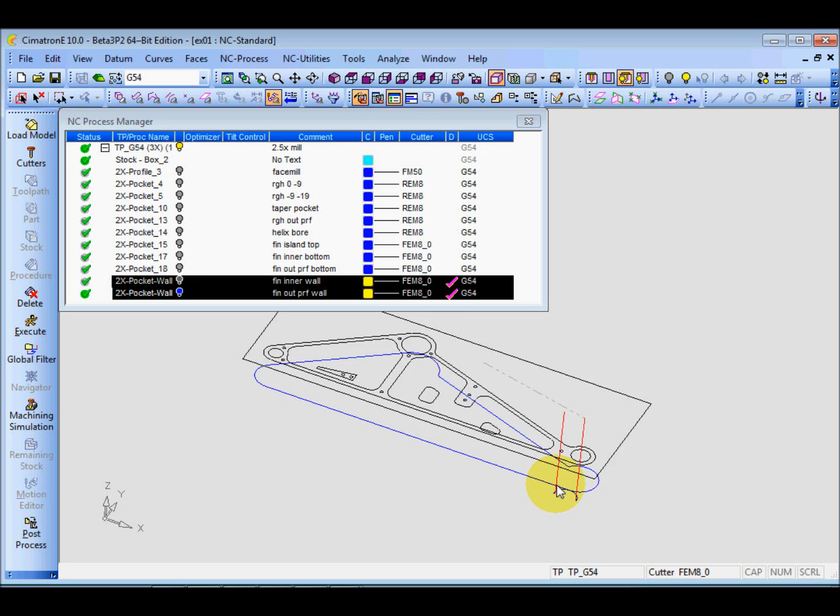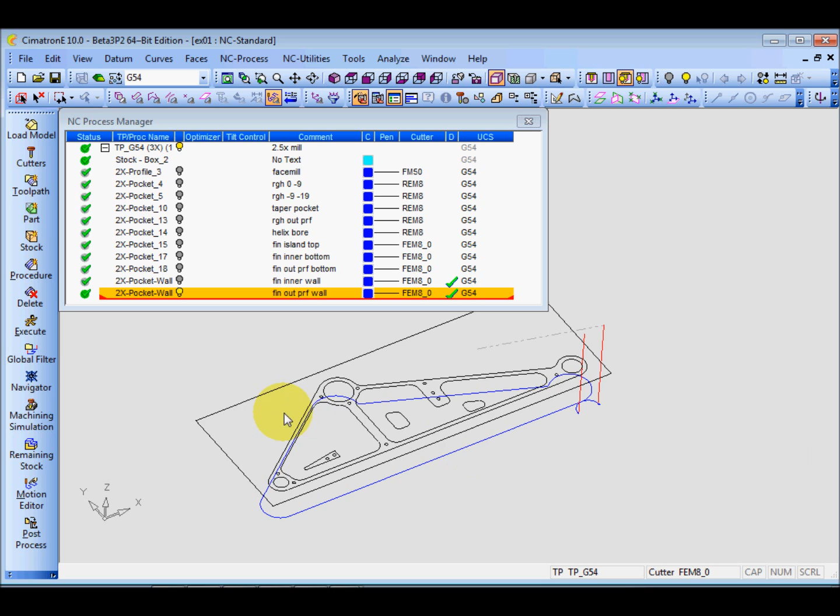And now sometimes, okay, you want to control the starting point and have some overlapping on the profiles. So this thing, if you use the pocket finish wall, you cannot control it. So let's say I don't want my starting point to be here, and maybe I want to start at the middle and have an overlapping. Okay, so if you need that, then you have to change to profile close contour.

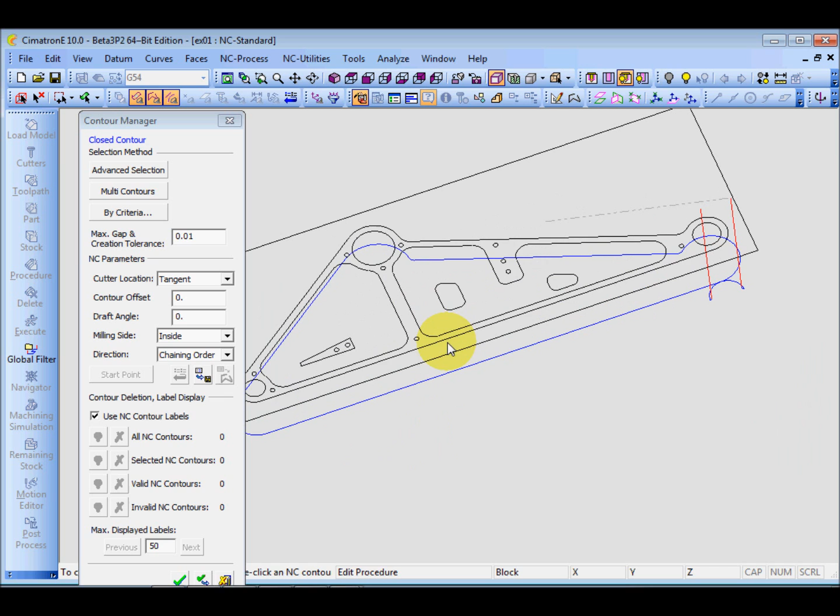Profile close contour. Okay, and here I will go and reselect my contour. Reset all, yes, and I will select here. Okay, and press middle button to confirm. Right. So if you want to change, do you see here? Now I'm cutting inside, tangent inside, because here milling inside. If I want to change here, I can change.

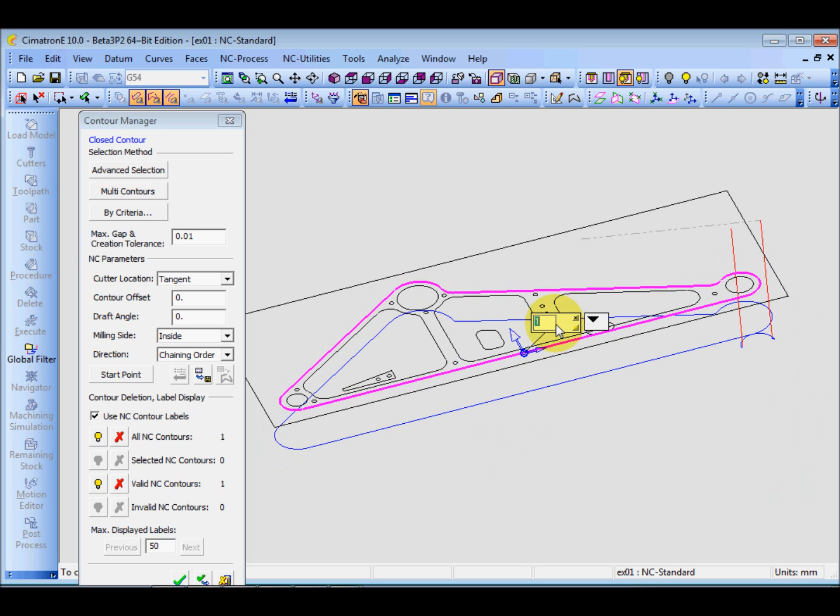Click on this label here. I can change to outside. The arrow now is outside. You see this start point here. Okay. If I don't want this location, I can always change my start point to maybe this endpoint here. Also is possible, right?

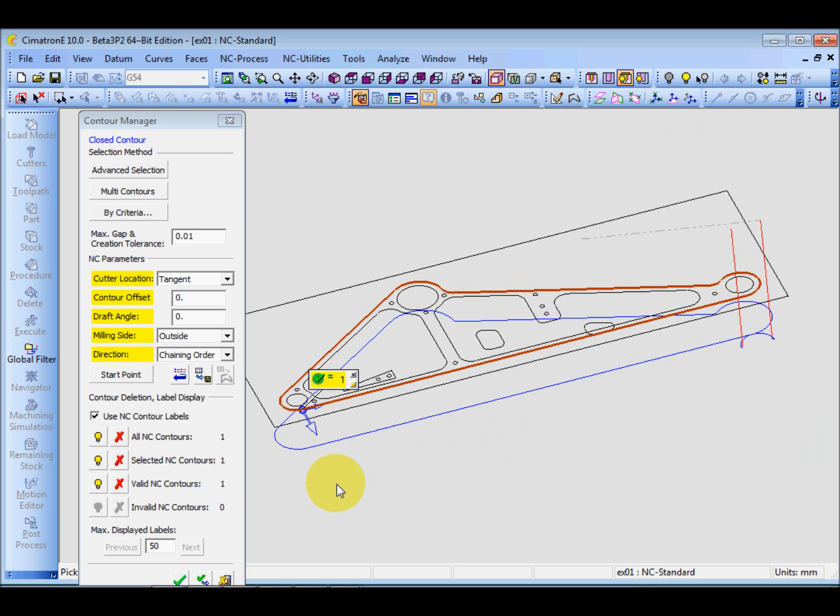And yeah, this only can be done in profile. So it can be a close and open. Of course, this is close. I have to use a profile close contour. And let me look at the approach. Here I can specify the extension beside the tangent. I can also say I want to extend, right? Maybe I want to extend by 10 mm, for example, and for the retract, I will put maybe 10 mm. Okay, also the tangent.

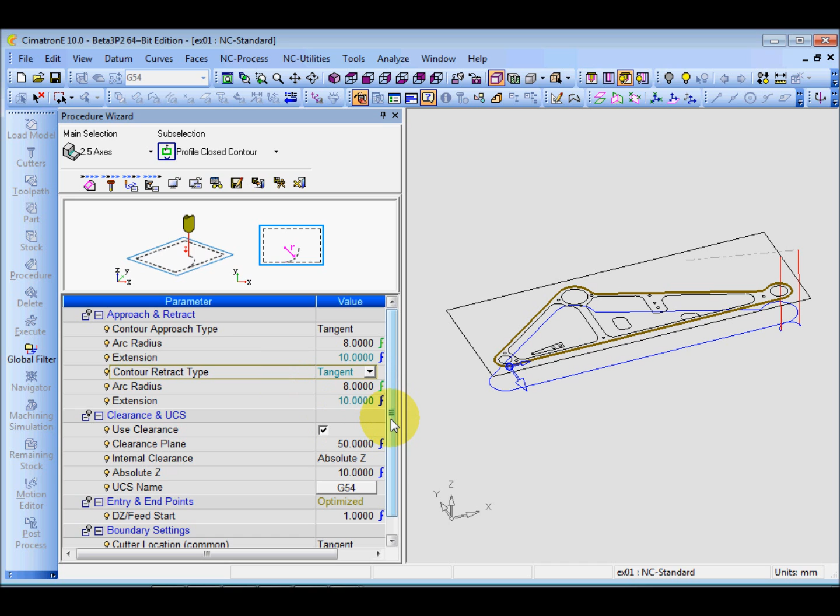And let's calculate and see the result here. Do you see here? This is 10 mm, this is 10 mm extensions. So maybe in this case, for the approach, just use normal and 2 mm. 2 mm is okay. This is good for the compensation line, and extension 10. And for the retract, the tangent output but no extension. So I can adjust like this, and this will be nice, right?

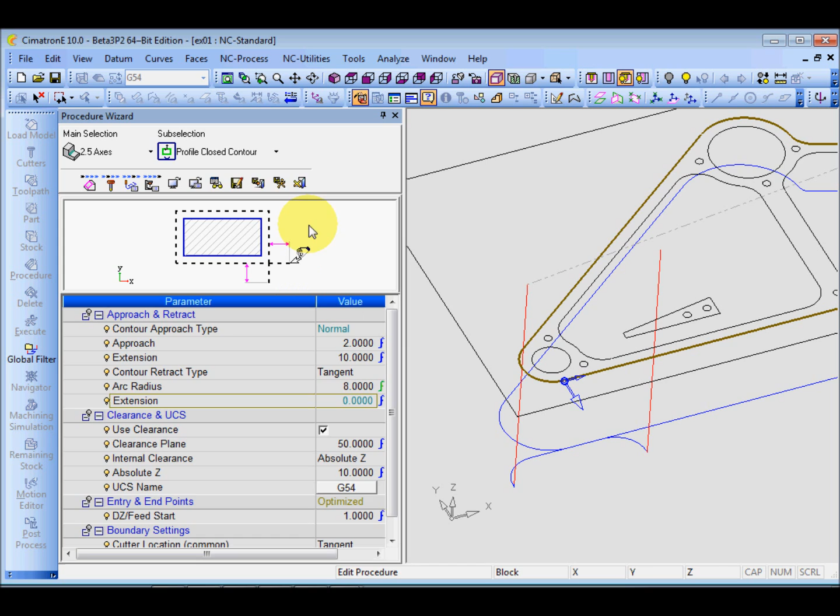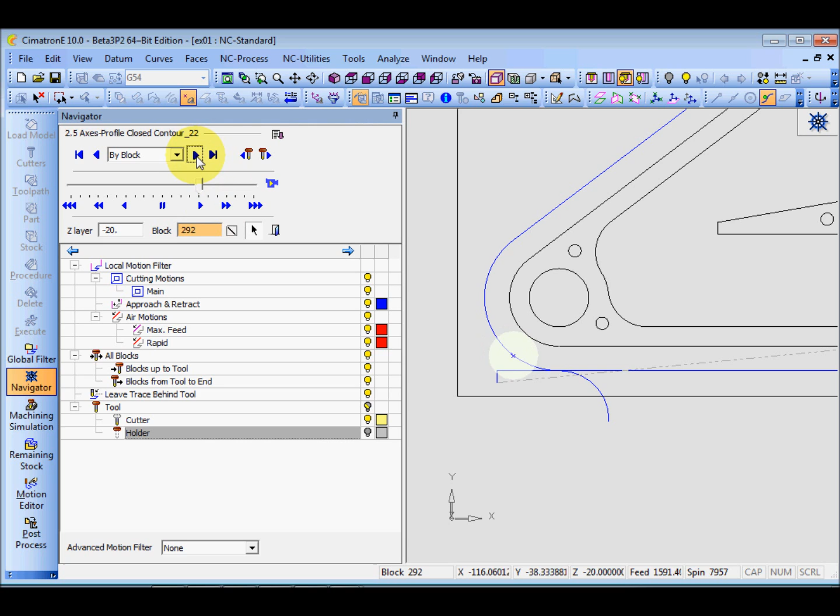It's good. You can check, navigate, right? Like that. Let's go to the top, right? Go in and cut, and after finish, come back and tangent out, right? This is profile.

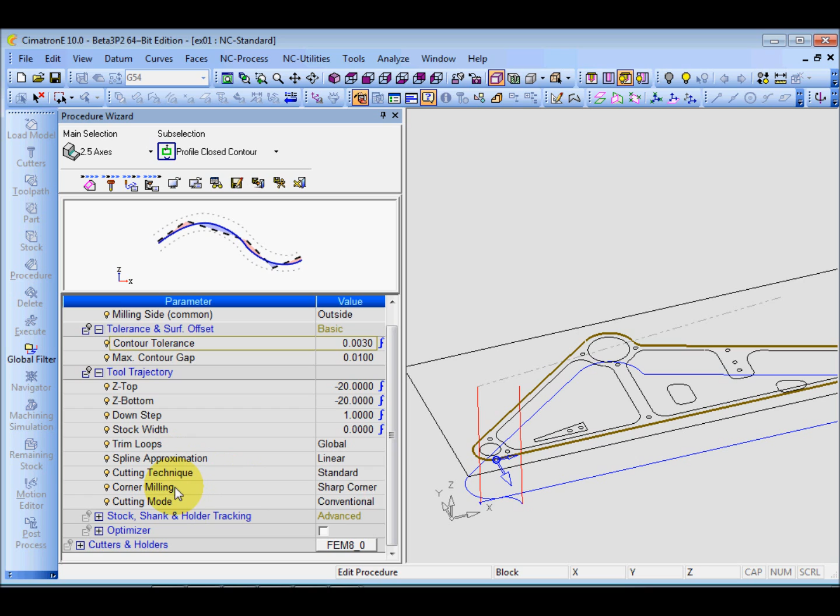Okay, so under this close profile also, you can control tolerance again. It's okay, and the Z-Top is okay, everything is okay, and sharp corners. If you have some sharp corners, then you can control the sharp corners, either sharp motions or sharp corners or round corners. Okay, in this case we use sharp corners is enough because there's no sharp corner here. Okay, the default is okay.

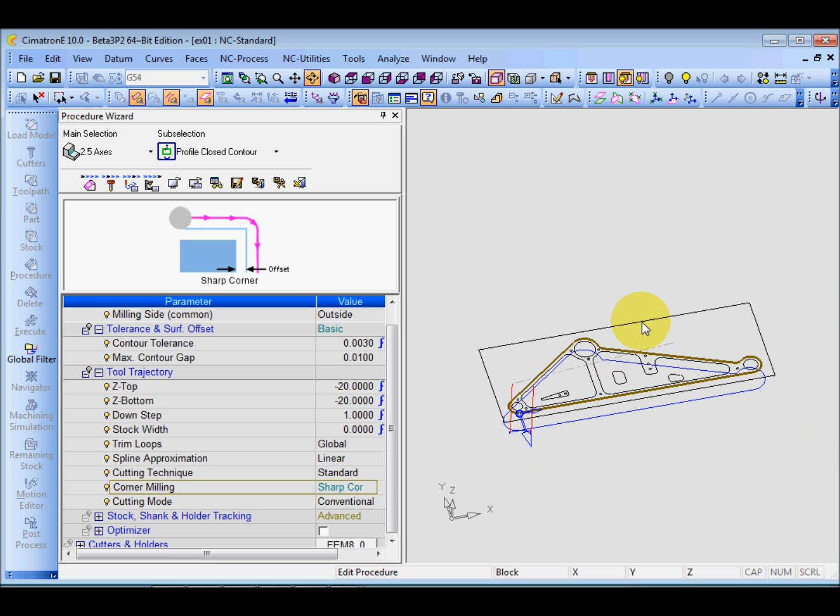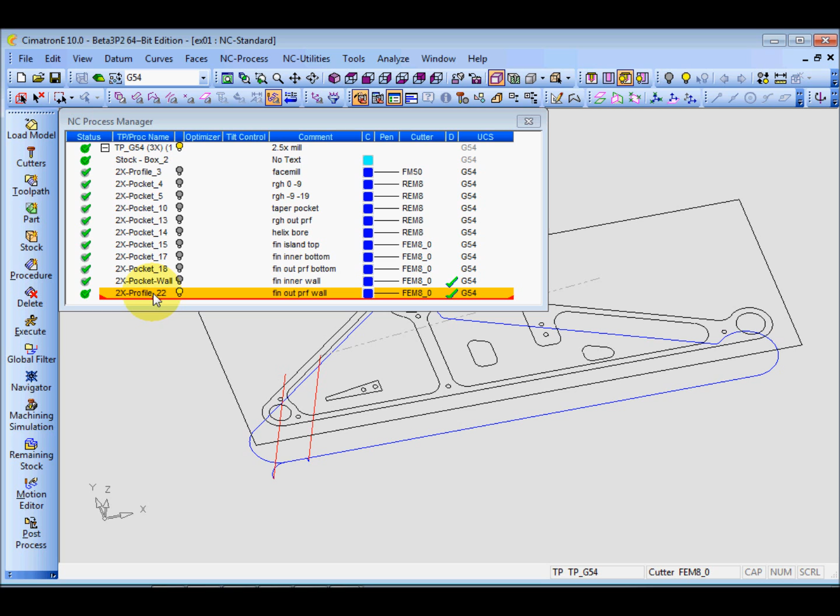And okay, cutting, I'm going to change to climbing milling, right? Climbing milling and calculate. Oops, if I change to climbing milling, then I have to change my start point. So it's entry from here. So let's edit the contour again. Click on the label and change the start point to this end point here, right? Calculate, and now we have the correct profile for this.

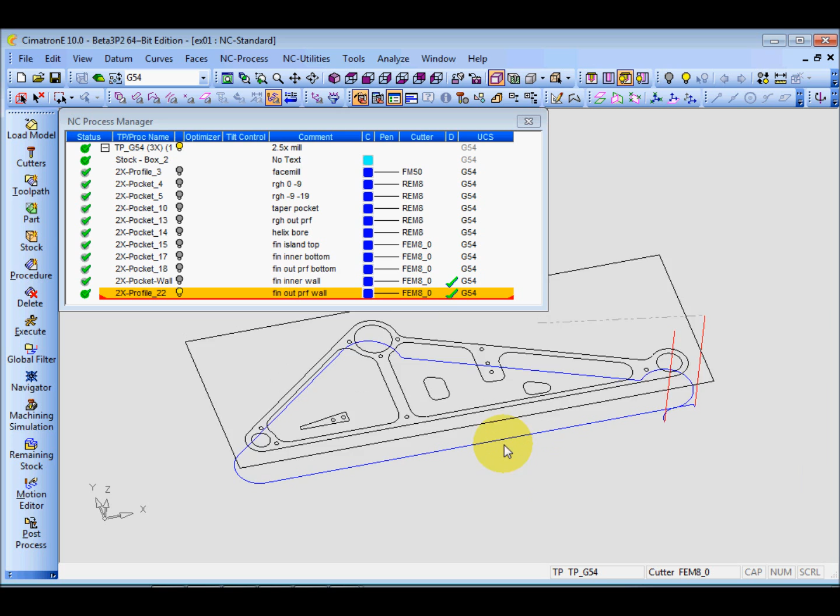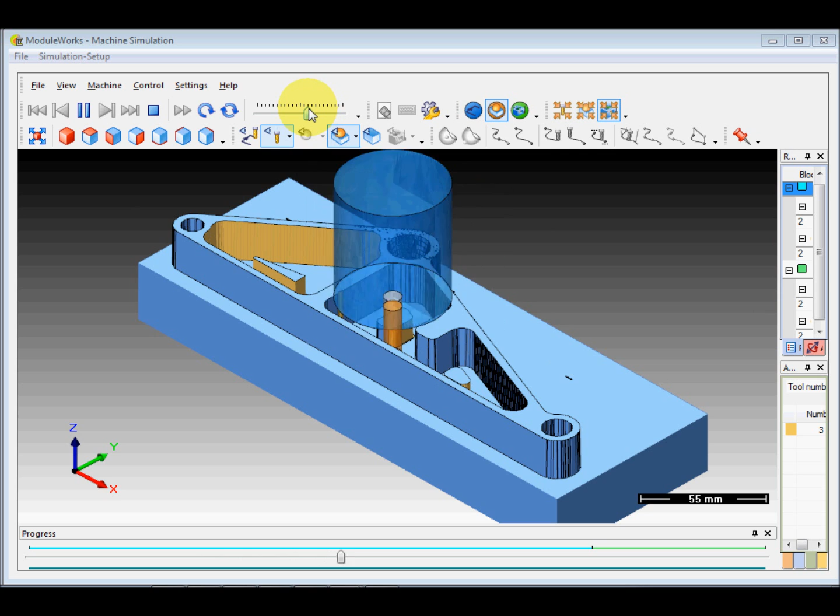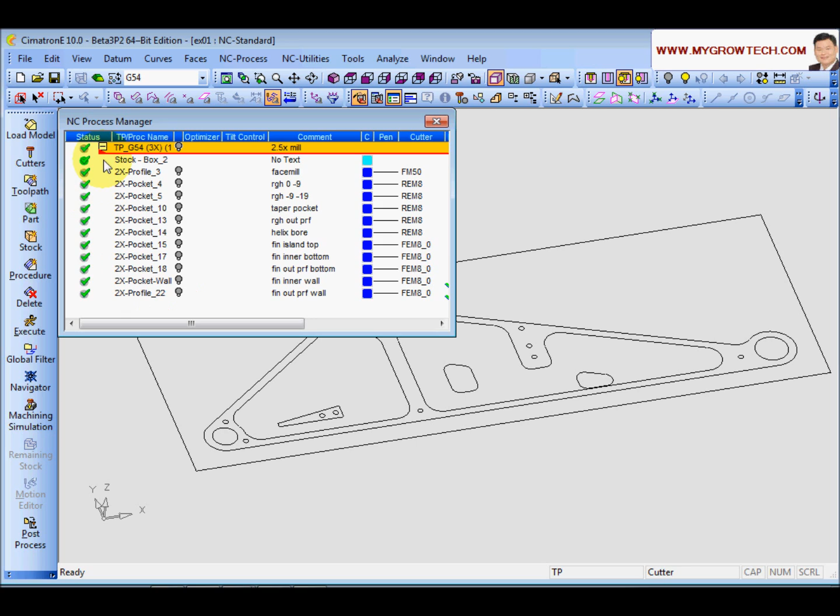Next, I'm going to create some 3x drilling process. As you can see now, under the current tool path, we got a lot of processes, and if we continue, it will become messy. So another way is to create another TP just for the drill. Okay, make sure the UCS is correct. And if you create a stock at this second TP, it will overwrite all the previous stock. Okay, so I'm going to use the previous stock. That's why there is no need for me to create another stock.

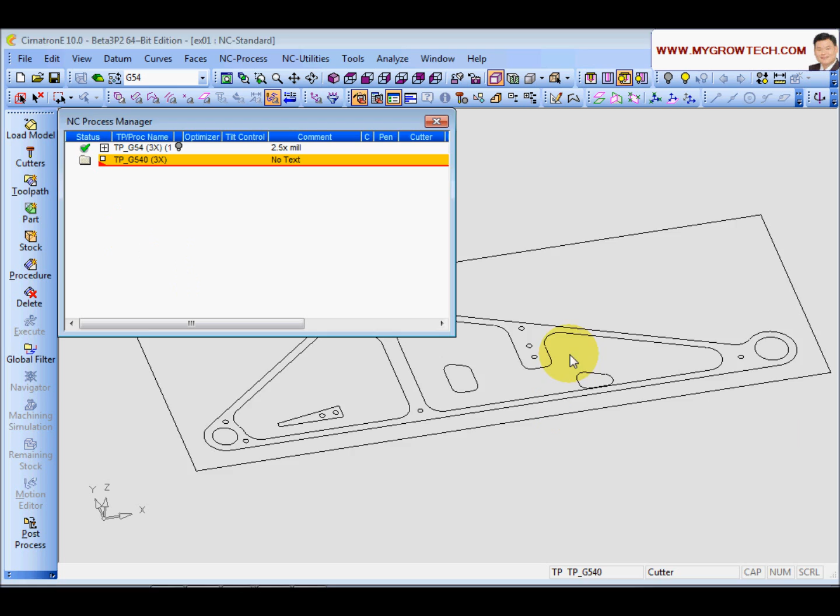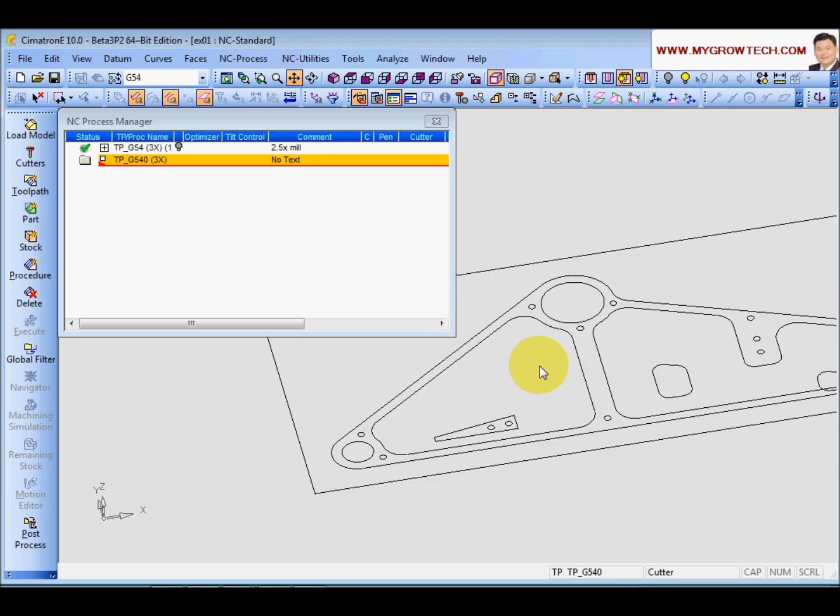So now I'm going to create a drilling. You can see here I have 2 holes here, and these 2 holes and these 3 holes. They are at a different layer. Okay, so I'm going to show you how to drill these 2 holes by 3 mm, these by 6 mm, these 3 holes by 9 mm, at one time by using a 2 mm diameter drill.

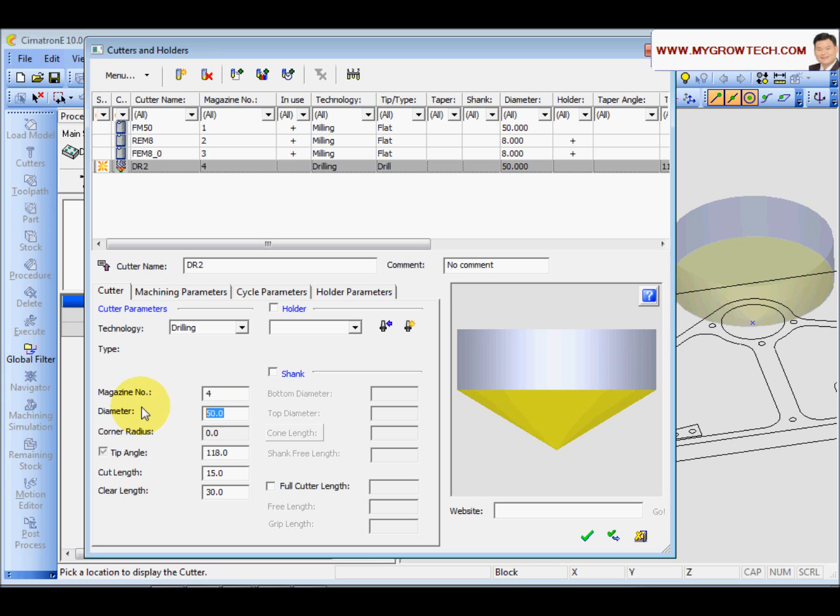So click on the procedures and go to the drill, and make sure you choose 3x drill, and then go to cutter sections, and I'm going to create a new cutter, so the DR2 2 mm drill, change the milling type to drill, and diameter to 2, and cut length maybe will be 10, and maybe this will be about 50, right? Let me specify a holder for this drill.

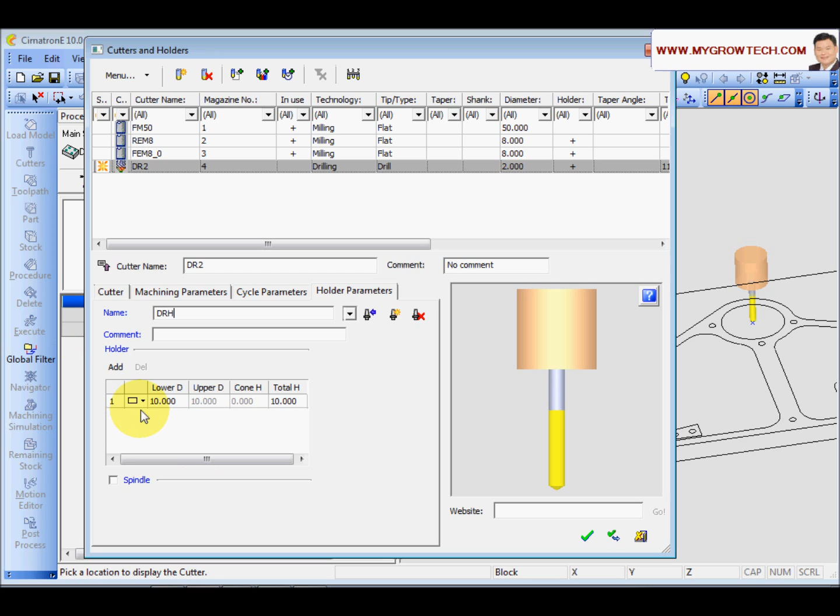Go to holder parameters, new holders, DR holders, drill holders, and 10 mm is okay. How about this 30? Right, this is our drill. And okay.

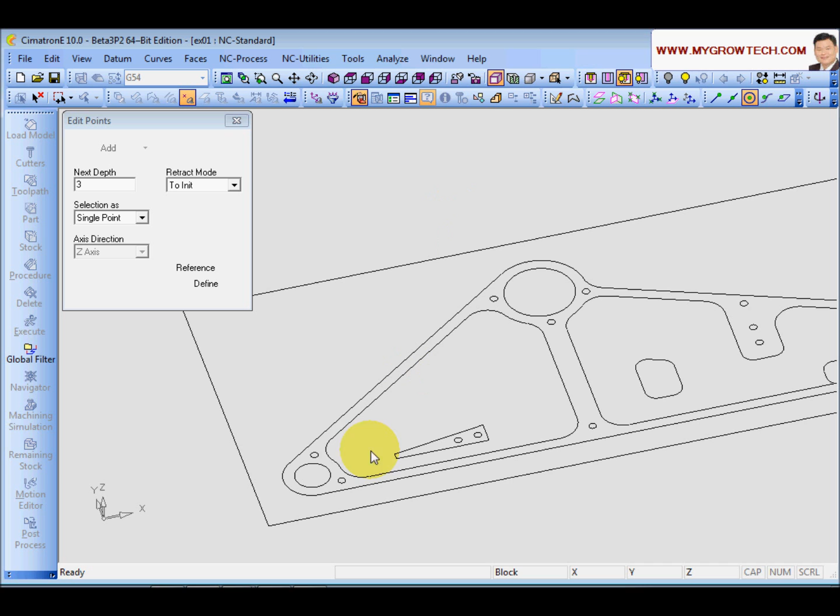So after creating a tool, next I'm going to select a point. Click on here. Okay, immediately you have a dialog here, the depth. So let's say for this tool I want to have 3 mm, so I key in 3, and I turn on the circle option here and select this and this, just like that.

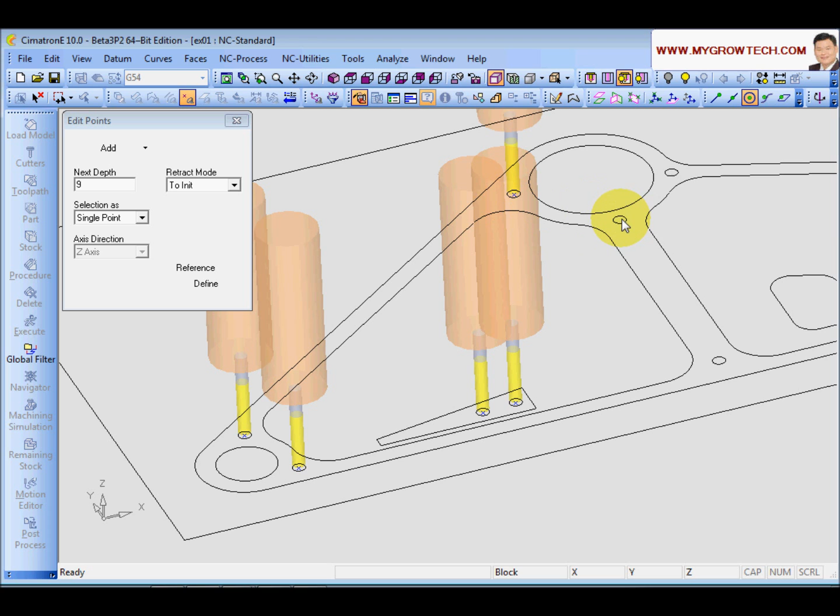For this 6 mm at the level -10, also the same, just key in 6, and I can select just 2. Okay, different layer. And for the last, I'll put 9 back to this. Okay, so I'm keying in different depths and selecting the points at different layers. Then press the middle button to exit, to accept.

Next, we go to the motion parameters. Okay, let's look at drill parameters. The first thing that you must decide is which canned cycle you want to do. For example, I'm going to select a high-speed peck. What is high-speed peck? Look at this. This is for FANUC. So if you choose high-speed peck, it will be G73.

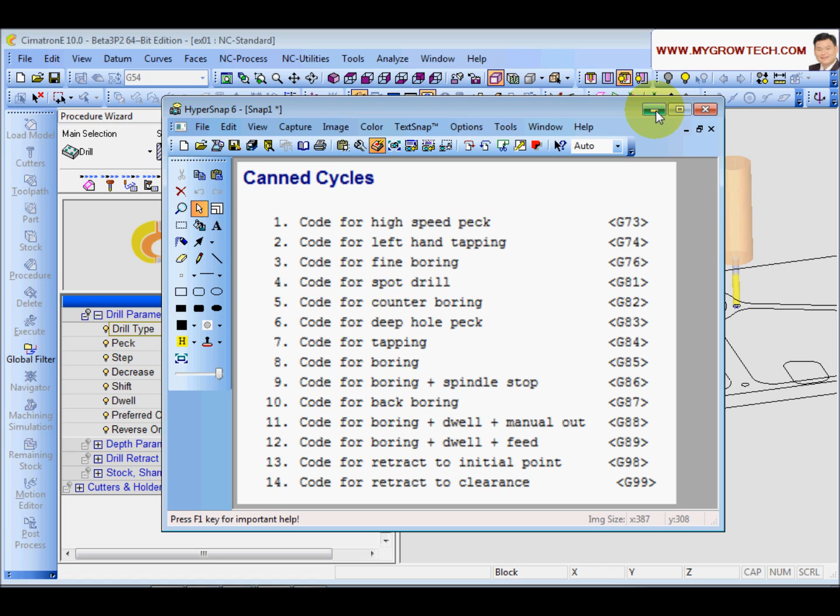If this is a Heidenhain machine, it might be different. Okay, this is a list of the canned cycles that we support for FANUC. High-speed peck G73, and the step is the Q parameter, the pecking depth. And decrease, we don't support this in FANUC. This is fixed inside the machine parameters, but in Heidenhain we still can specify this.

If you see something that is unchecked, don't check it. For example, dwell. In G73 we don't support dwell, but in Heidenhain the drilling cycle dwell is supported. Then you have to know it if you know what the canned cycle is. You need to understand the canned cycle.

And next will be the depth parameters. Okay, the depth parameters. The max depth. This is for 3D. If you selected a 3D cylinder, it can calculate the depth of the hole for you. In this case, we just select the point, so this function is not used now.

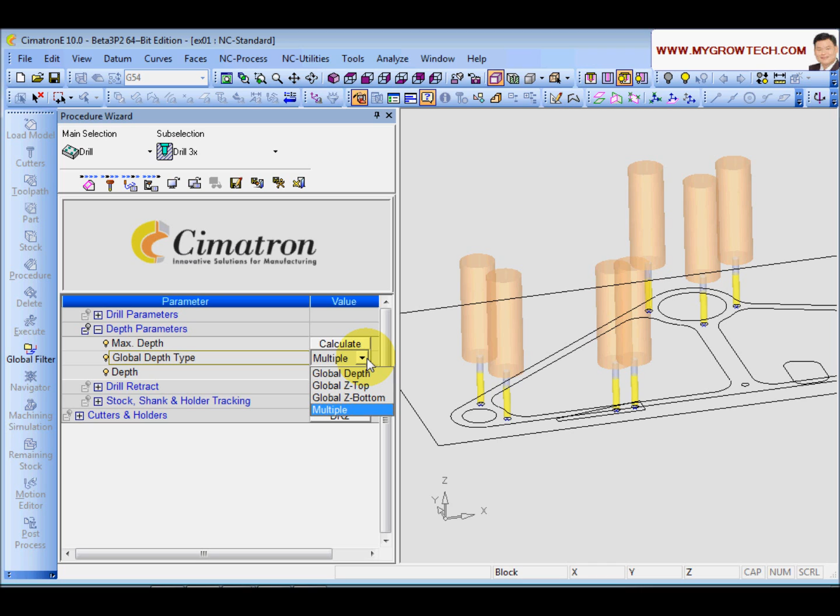Global depth type: because just now we keyed in 3 mm here, 6 here, and 9 over here, the global depth type becomes multiple. Of course, we have other options. Later, I'm going to show you what the other options mean. And depth, the reference of depth. You have the option to cutter tip, full diameter, or chamfer diameter. I will use the tip as a reference for now.

And the retract mode is to init or to retract. In G code, if I'm not mistaken, it is G98 or G99. So it's good to use to init and set init maybe to 30, so it is much safer. Of course, it costs you a very tiny cycle time, because you need to jump back to 30 mm every time after finishing the drill. Delta retract is the R parameter for the drill.

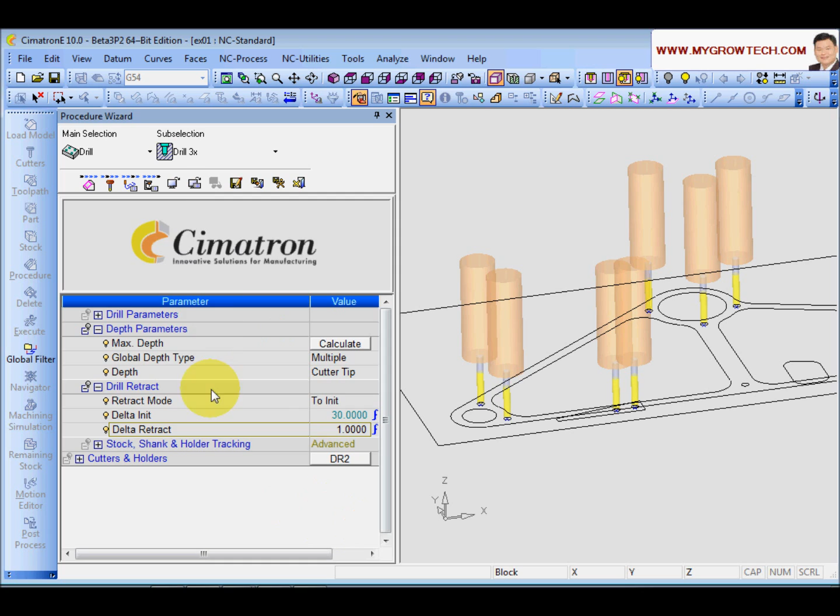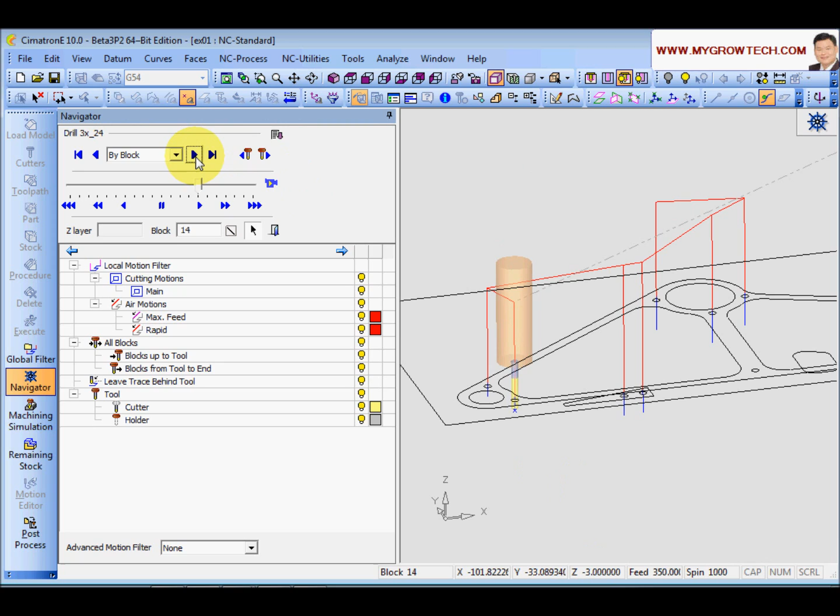So after finishing setting this, the motion parameters are the same. Key in the RPM, the feed, and the coolant if you need, then you calculate. And let's check the navigator. You can see when I specify to init, the drill will start from Z30, the init clearance, go down, drill a hole, go back up to Z30 and go to the next hole. This is the to init option.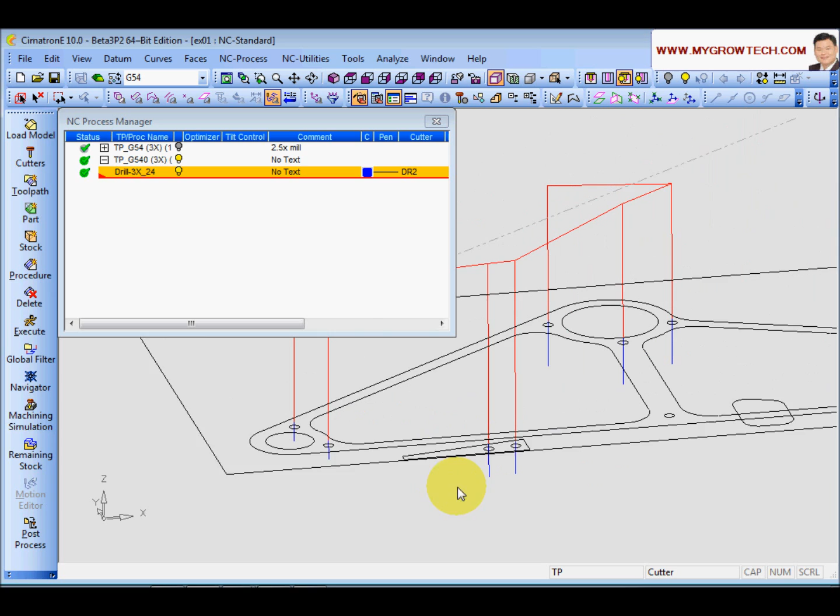And of course, in simulation you cannot see the motions, but this is not important, not a big deal. And you see here, this is 3 mm, this is 6, and this is 9 mm at a different layer.

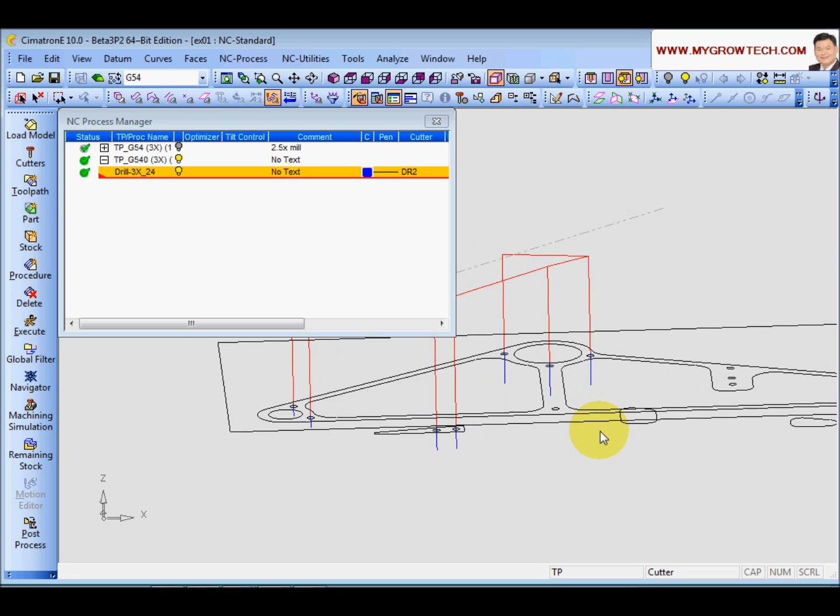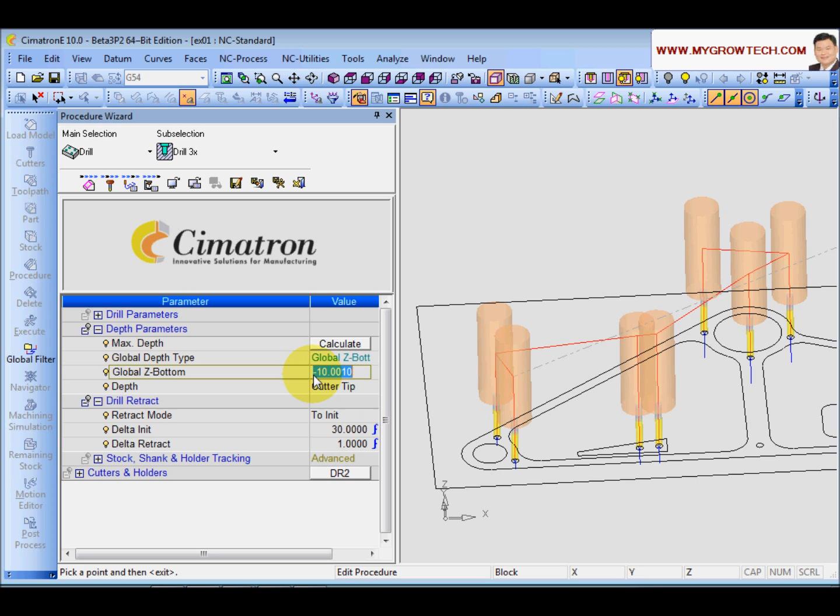Okay, what happens if I want all the drill depths to be the same? Maybe I want all the holes drilled from the circle position to -20. If you need that, you can change it here. Go to parameters. Under the global depth type, you can choose global bottom. Then you specify maybe -20 and calculate. And now you can see, you start the drill from the point to a global depth of -20.

And for the global top it is the same. You specify a global top, and it will drill from the top to the point that you select. So I'm going to change the global depth now. Maybe go to a global depth of 6 mm and calculate.